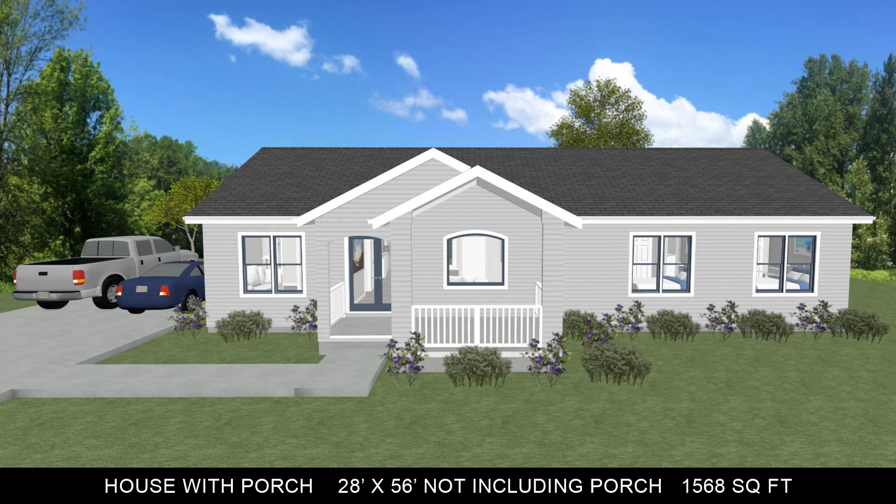I have drawn a simple floor plan layout for a 1,568 square foot home, which is 28 foot by 56 foot in size. It has 3 bedrooms, 2 bathrooms, and 2 living areas.

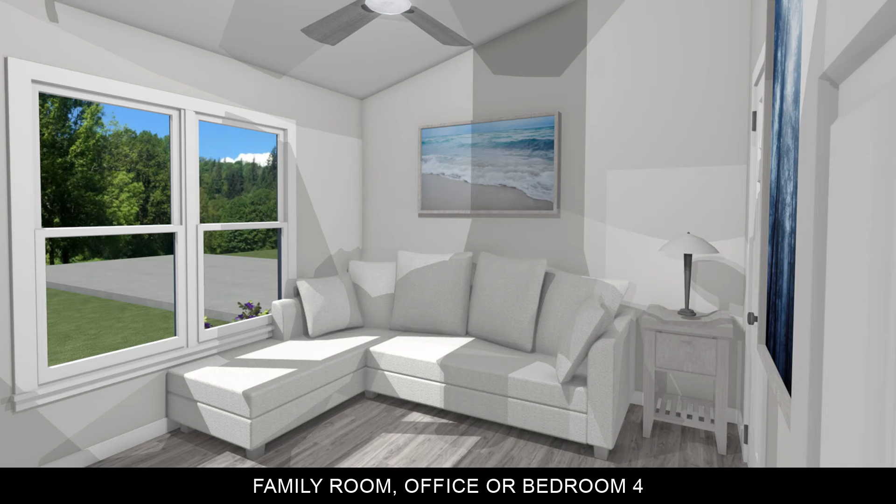Here is the same floor plan reversed.

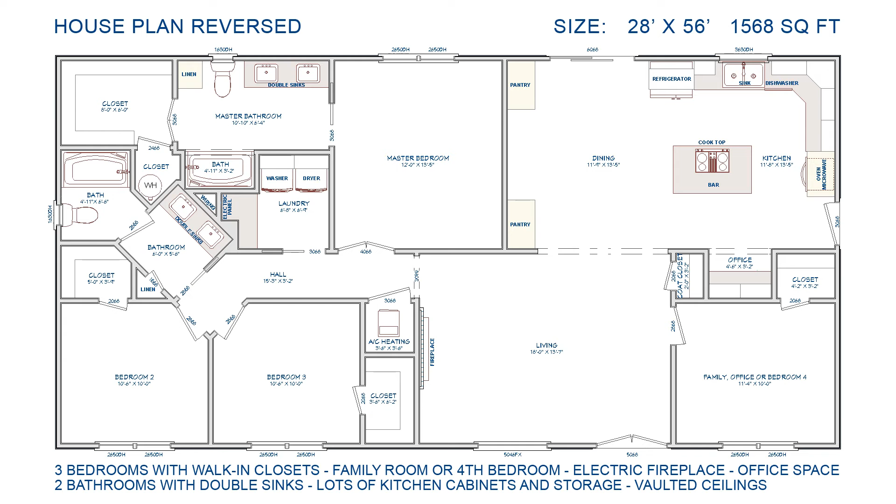Here is an exterior view of just the house.

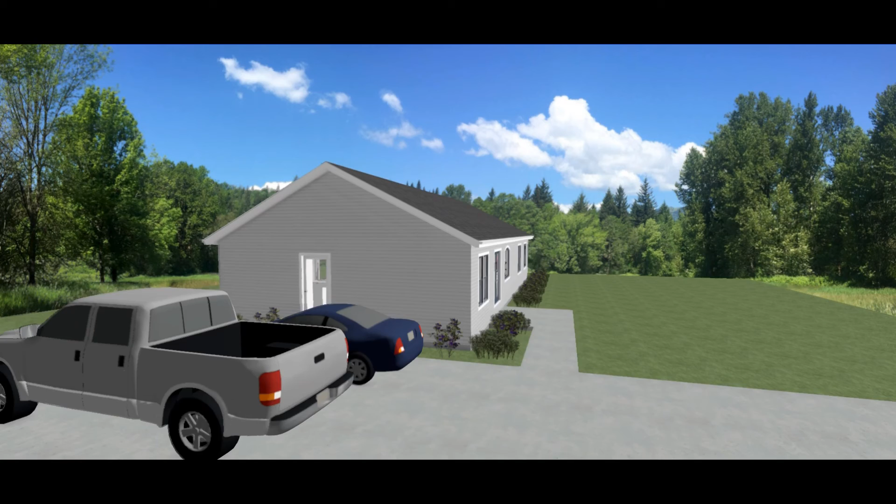As you walk inside the house, you will see how open and inviting the floor plan is. Most of the rooms have vaulted ceilings. The floor plan was drawn with a 3/12 ceiling pitch. These rooms with vaulted ceilings give the appearance of being much larger.

The living room is 18 foot by 13 foot 7 inches in size and has a built-in electric fireplace with a place for a TV above.

The living room opens to the dining room, which is 11 foot 9 inches by 13 foot 5 inches in size. There is a 6 foot sliding glass door and 2 pantry cabinets inside the dining room.

The kitchen is 11 foot 8 inches by 13 foot 5 inches in size and partially open to the living room. There is a center island with a built-in cooktop and breakfast bar.

The microwave and oven are built into a large cabinet. There is a built-in desk in the kitchen.

This bonus room, which is 11 foot 4 inches by 10 foot in size, could be used as a family room, office, or a 4th bedroom with a closet. There is a coat closet on the left.

As you go down the hallway, there is an air conditioning and heating unit on the right. The master bedroom is on the left, which is 12 foot by 13 foot 5 inches in size and can easily accommodate a king-size bed.

The master bedroom doors are 4 foot wide French doors. The master bathroom and master closet doors are 36 inches in size and could easily provide wheelchair access.

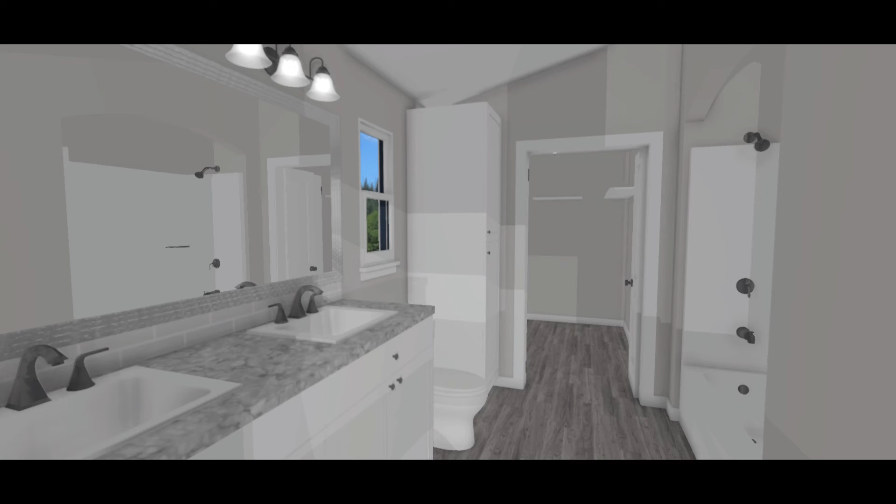The master bathroom is 10 foot 10 inches by 6 foot 4 inches in size with a 6 foot double sink vanity, a small window over the toilet, and a linen closet.

There is a 4 foot 11 inch by 3 foot 2 inch bump out for the bathtub with a shower, or plenty of room for just a shower.

The master walk-in closet is 8 foot by 6 foot in size. There is a small closet inside the master closet that houses the water heater and additional storage. This small closet will also provide plumbing access to both bathtubs.

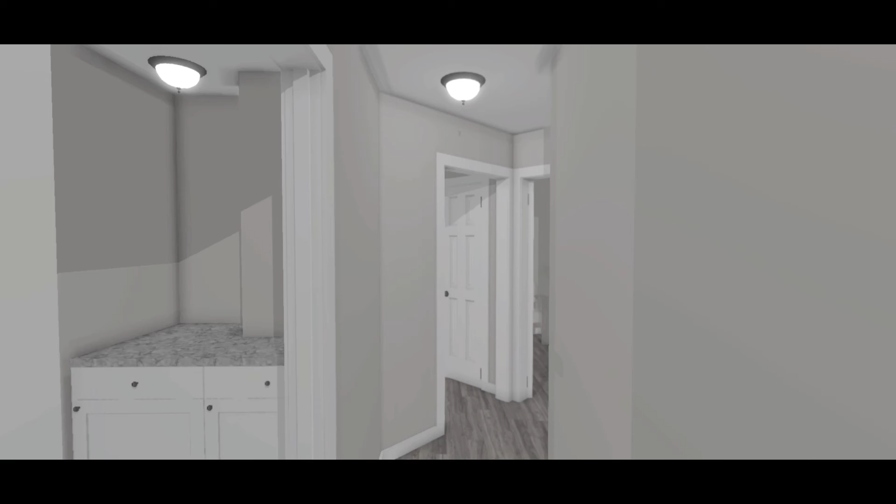The laundry room is 6 foot 8 inches by 6 foot 9 inches in size. There are wall cabinets above the washer and dryer and a counter to the right. The electric panel could be installed in the wall above the counter.

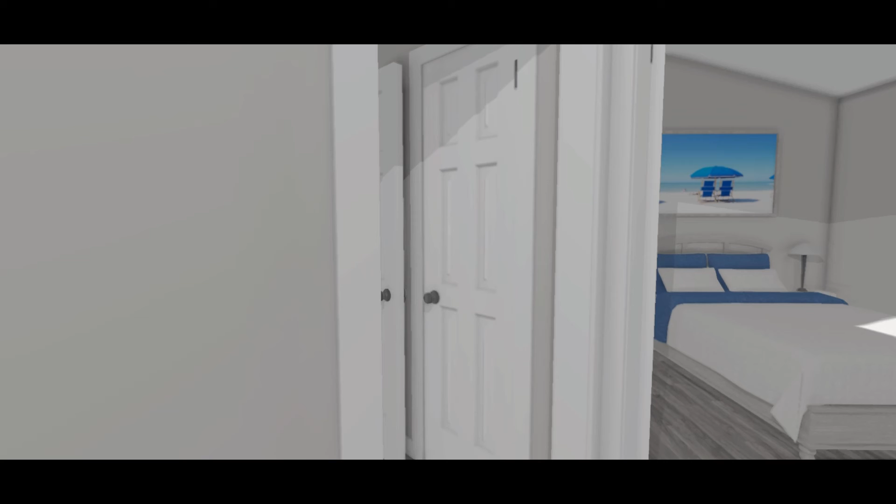Bedroom 2 is 10 foot 6 by 10 foot in size and can easily accommodate a queen-size bed. The walk-in closet is 5 foot by 3 foot 9 inches in size.

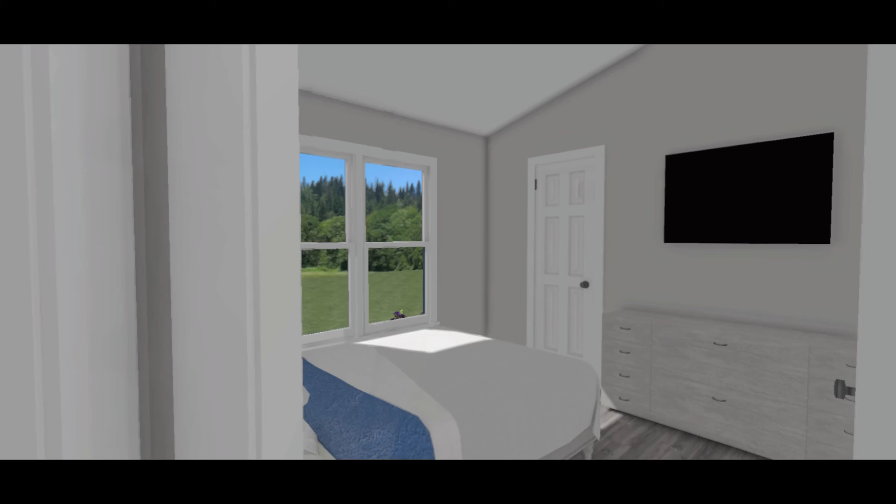Bedroom 3 is 10 foot 6 inches by 10 foot in size and can easily accommodate a queen-size bed. The walk-in closet is 3 foot 6 inches by 6 foot 2 inches in size.

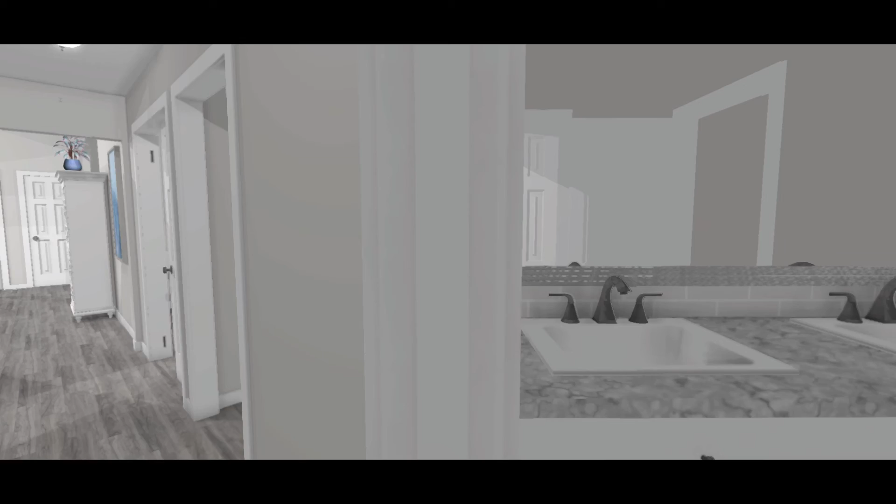The main hall bathroom is divided up into 2 rooms. The first room is 6 foot by 5 foot 6 inches in size with a 5 foot 6 inch double sink vanity and a linen closet.

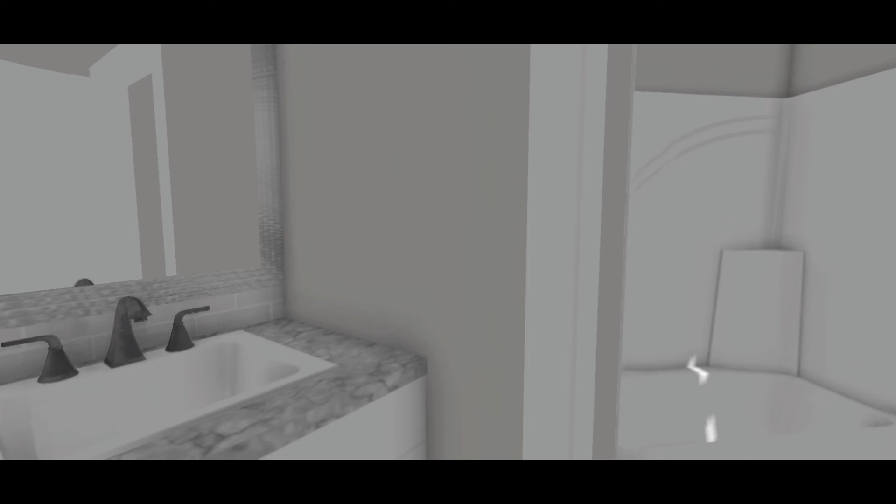The second room is 4 foot 11 inches by 6 foot 6 inches in size and has a bathtub with a shower and a toilet. There is a window above the toilet.

We are walking up the hallway to the living room.

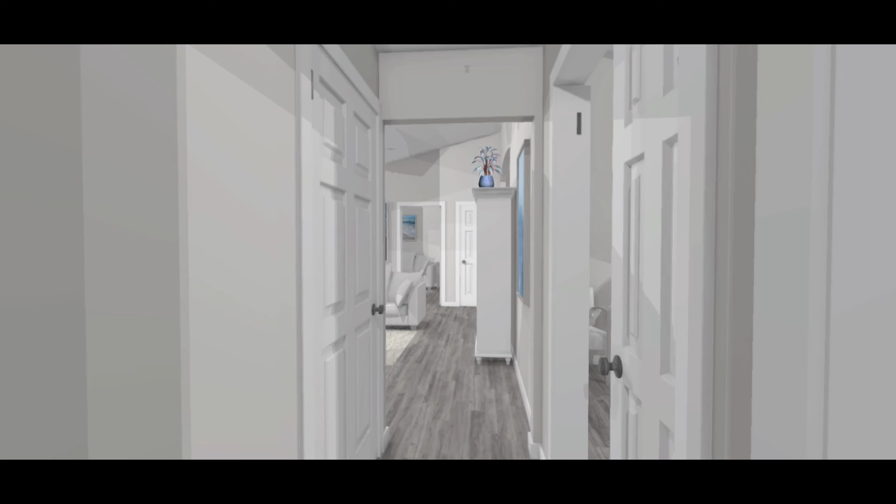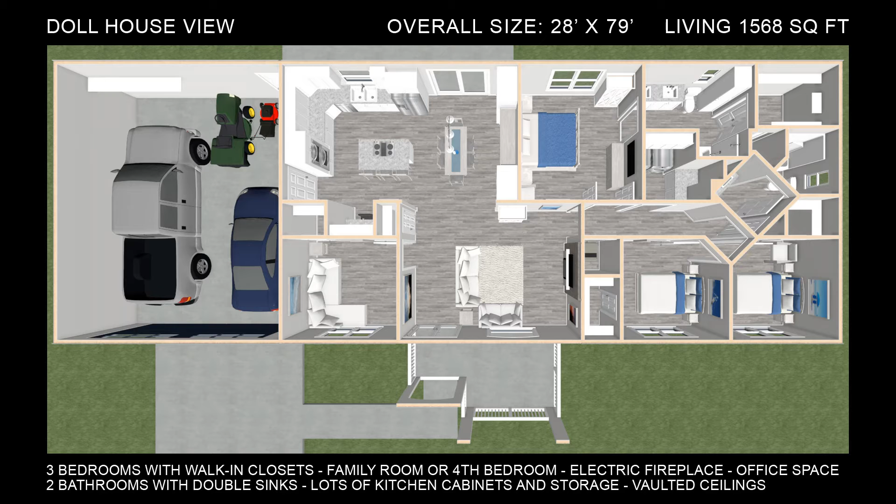The floor plan shows 8-foot exterior stud walls with a 6/12 roof pitch. Most of the ceilings are vaulted with a 3/12 ceiling pitch.

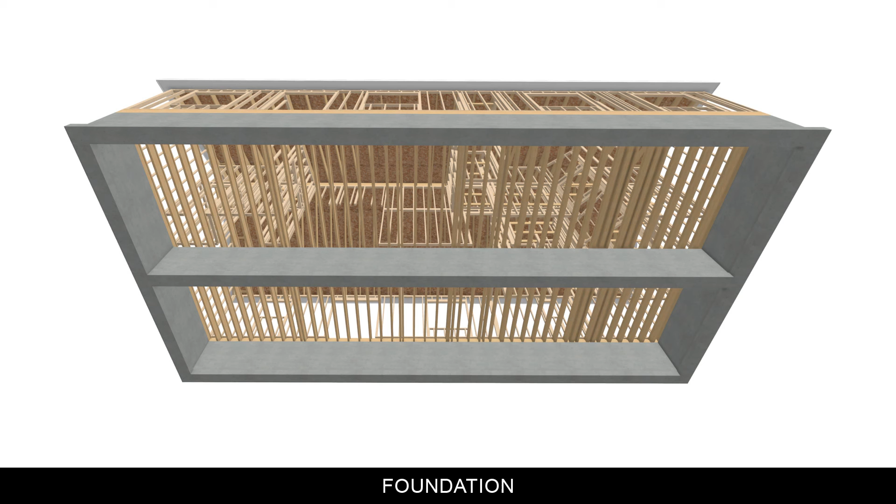In some parts of the country, homes are built using a concrete stem wall foundation or concrete pier and beams with a crawl space underneath. By making the home only 28 foot in width, a center stem wall or center pier and beams can accommodate 14-foot floor joists. The wider the home, the more expensive the floor joists will cost.

If the home is going to be a concrete slab-on-grade foundation, then the home can easily be modified to be a little wider for larger rooms. Here are some interior pictures of the house.